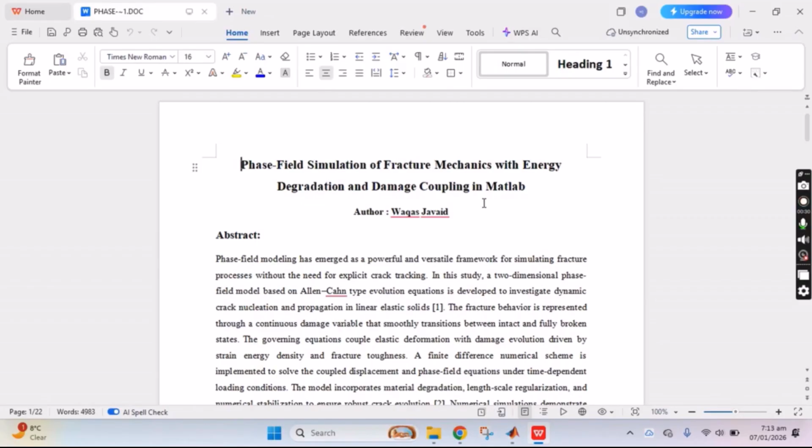So the fracture behavior is represented through a continuous damage variable that smoothly transitions between intact and fully broken states. The governing equations couple elastic deformation with damage evolution driven by the strain energy density and fracture toughness. So the numerical simulation basically demonstrates the initiation, growth, and interaction of cracks from initial flaws.

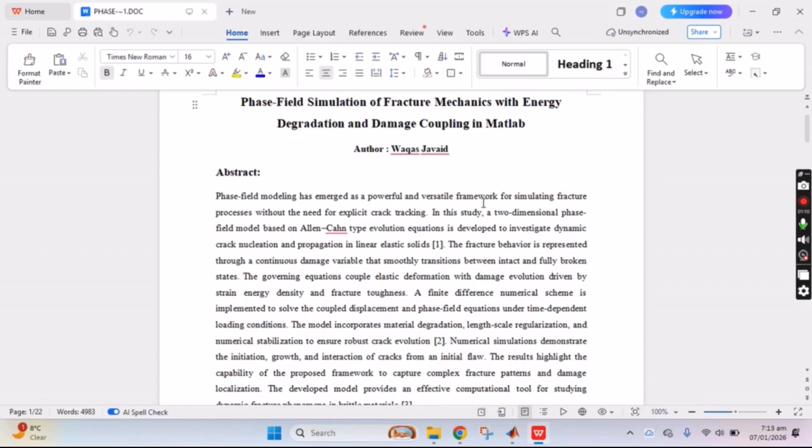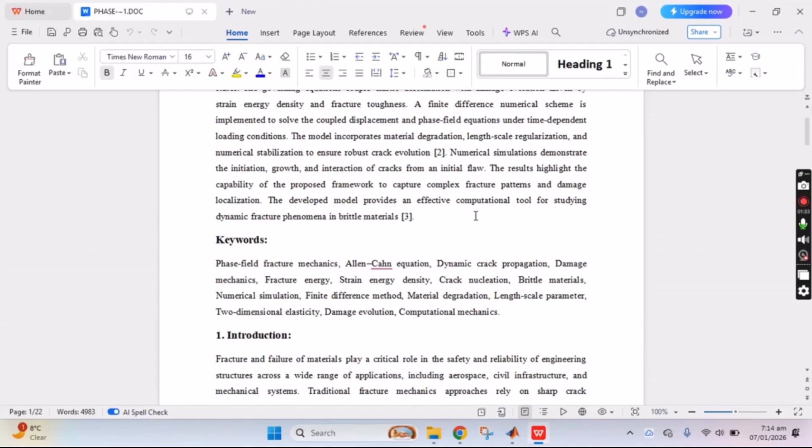In this paper, the results highlight the capability of the proposed framework to capture complex fracture patterns and damage localization. The model is basically an effective computational tool for studying dynamic fracture phenomena in brittle materials. So the abstract with the introduction is written. In the introduction, I have

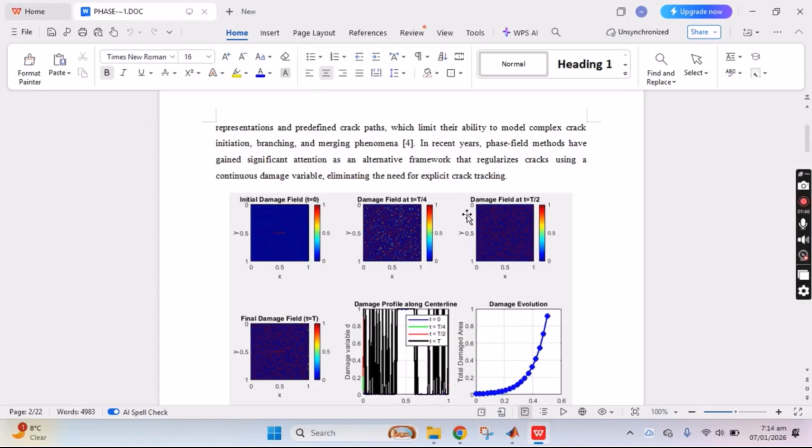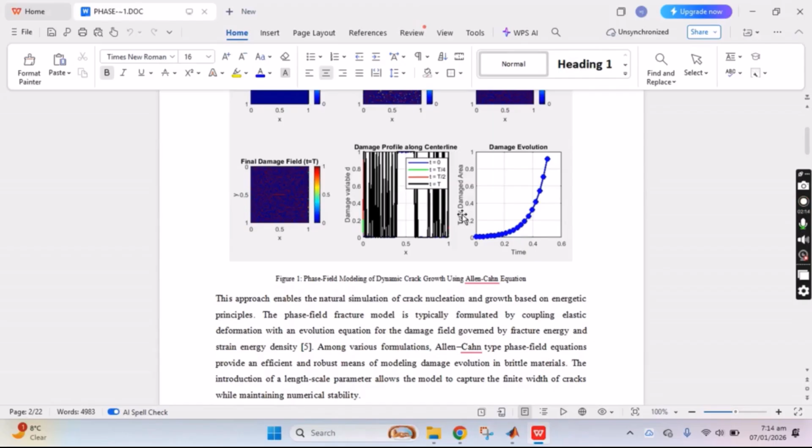explained how the initial damage field with the damage evolution, damage profile according to different phase field modeling of dynamic crack growth using the Allen-Cahn equation. Allen-Cahn was one of the scientists who proposed the type of phase field equations that provide an efficient, robust means of modeling damage evolution in brittle materials as well.

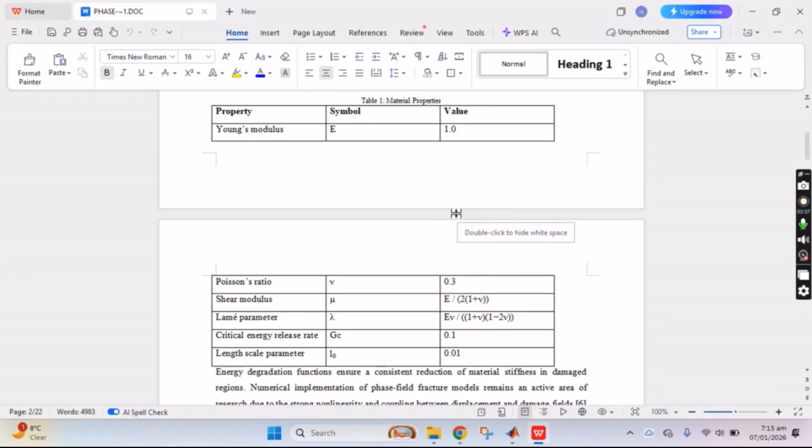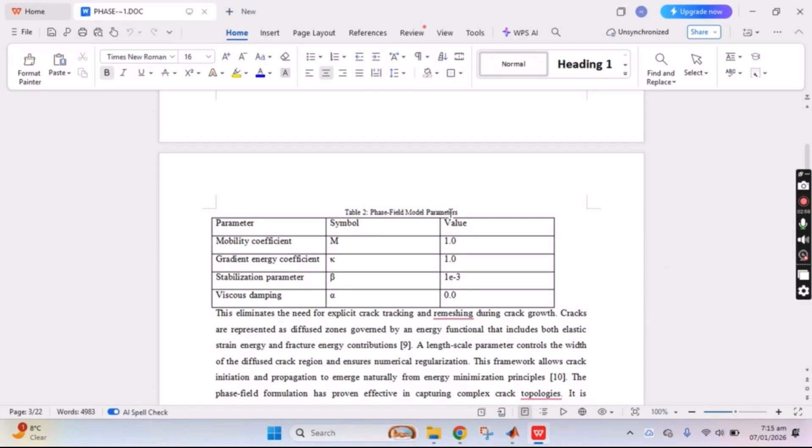Okay, so here are the material properties used in the energy degradation function, in which Young's modulus, Poisson ratio, shear modulus, Lame parameter, critical energy release rate, and the length scale parameter are also used. So this is the background with the phase field approach to fracture mechanics. In the fracture mechanics, I have added the parameters of the phase field model which I have used in the MATLAB code to develop the phase field model.

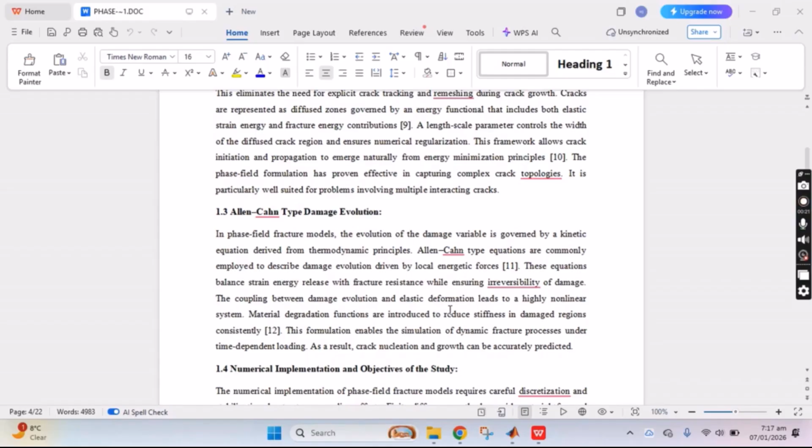Okay. So the Allen-Cahn type damage evolution basically, Allen-Cahn was one of the scientists who developed the equations that describe the damage evolution. So the Allen-Cahn type equations are normally used for damage evolution driven by local energetic forces. So these equations balance the strain energy released with fracture resistance while ensuring the irreversibility of the damage. Okay.

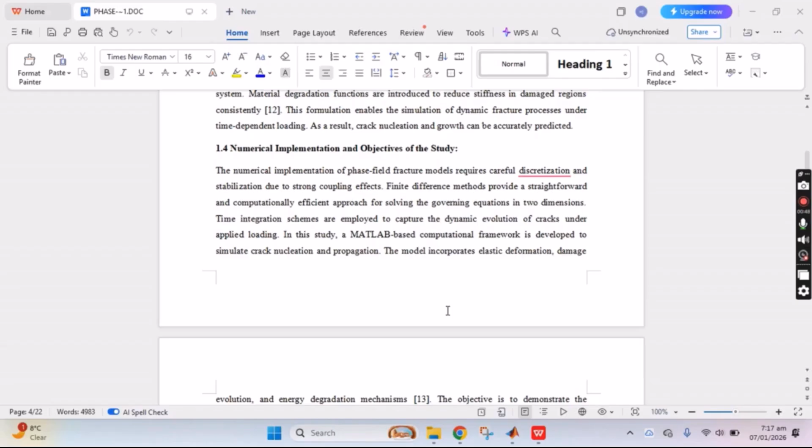So next one is basically the numerical implementation and objective of the study. In the numerical objective, we have added the MATLAB-based computational framework which is developed to simulate crack nucleation and propagation. The model incorporates elastic deformation, damage evolution, and energy degradation as well. So here is the role of energy-based fracture criteria with the dynamic loading and crack evolution and importance of length scale

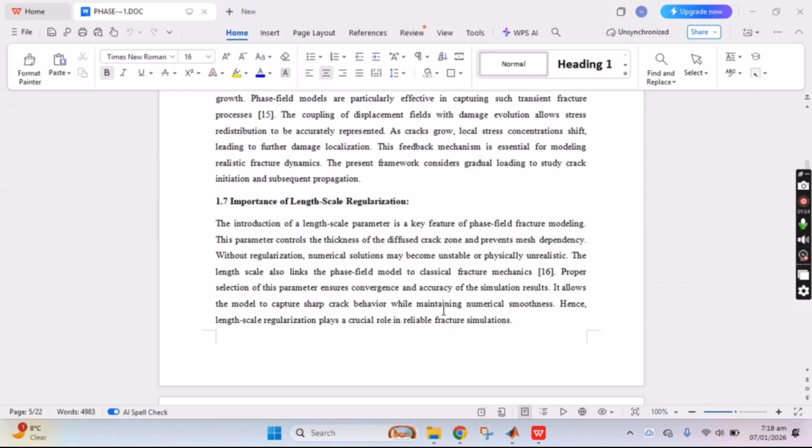regularization. The importance of length is that this parameter controls the thickness of the diffused crack zone and prevents mesh dependency. Without regularization, numerical solutions may become unstable or physically unrealistic. So the visualization and interpretation of damage evolution is basically damage two-dimensional contour plots and three-dimensional surface representations that enhance the physical interpretation. These visualization techniques aid in validating model behavior as well.

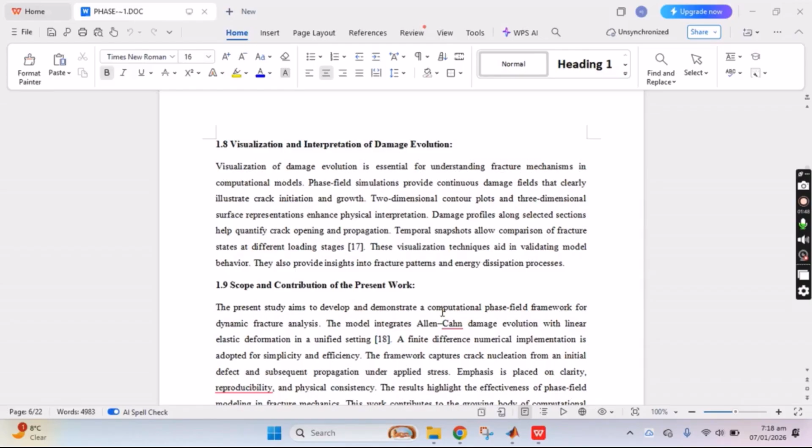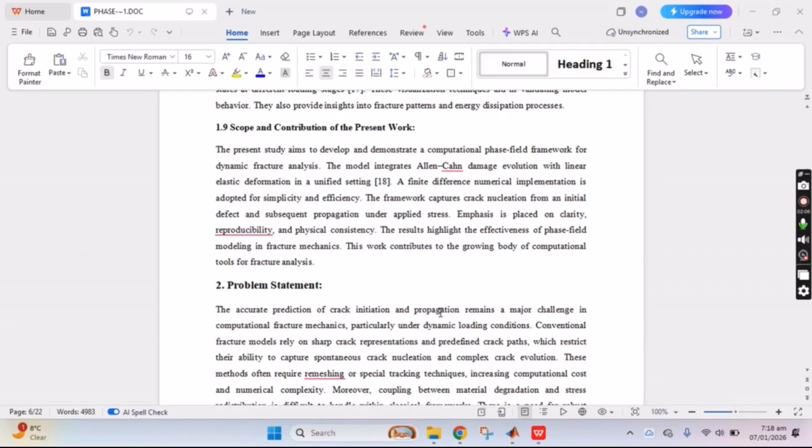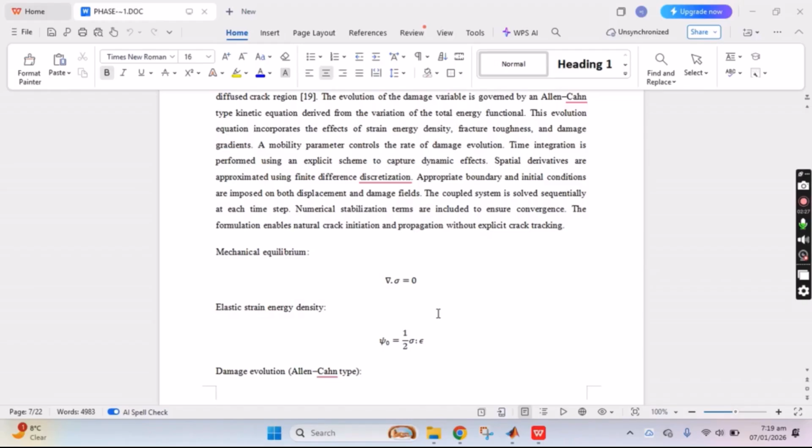Then the scope and contribution of the present work is that the model integrates the Allen-Cahn damage evolution with linear elastic deformation in a unified setting, and a finite difference numerical implementation is adopted for simplicity and efficiency. The problem statement is written, then the mathematical model is explained, and in the mathematical model I have written all the equations used, especially for mechanical equilibrium, elastic strain, energy density, damage evolution, and the Allen-Cahn equation especially.

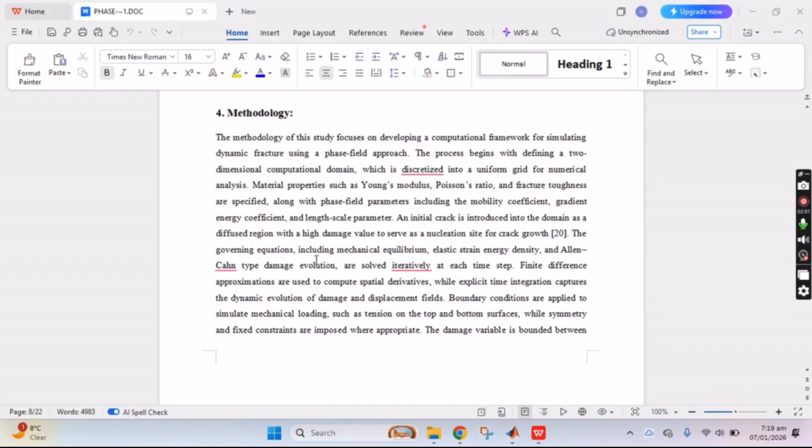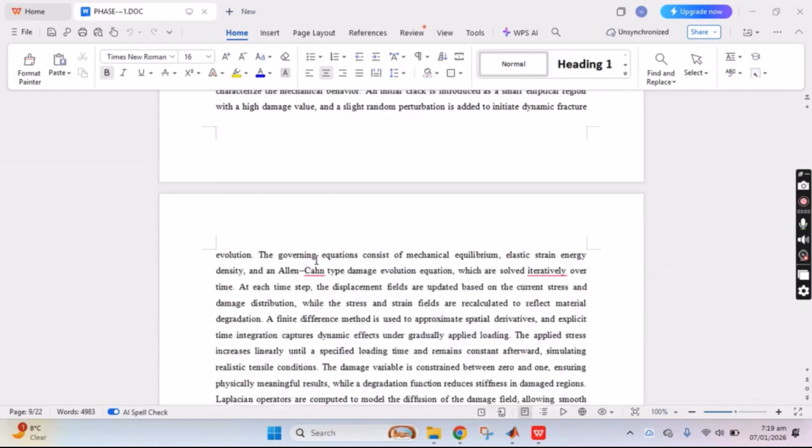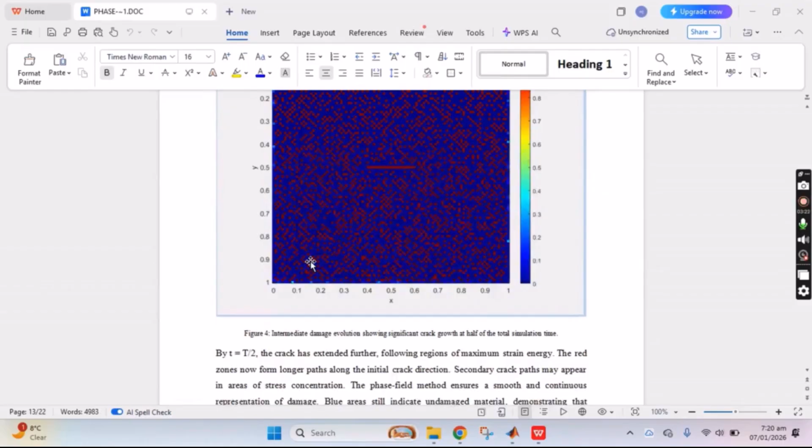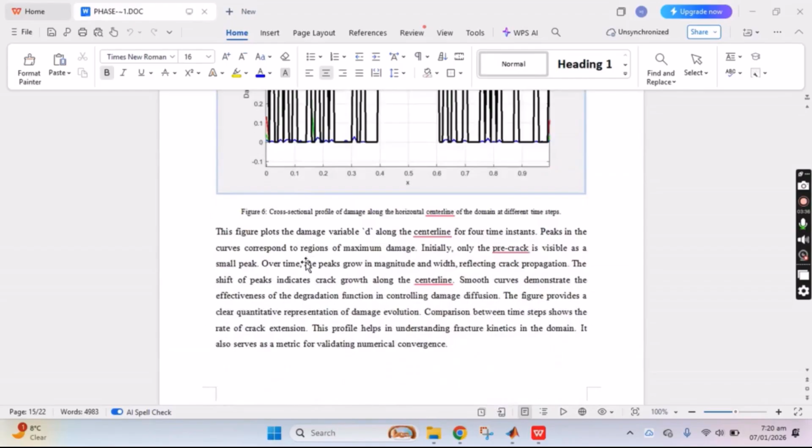Initial damage field at different time scales, like 1/4 of the total simulation time. This is the damage field at half time. Damage field at full time according to the crack propagation. This is the damage profile along the center line. Damage evolution over time. 3D visualization of final damage field. Crack propagation sequence as well, and the results and discussion with the conclusion and references are added.

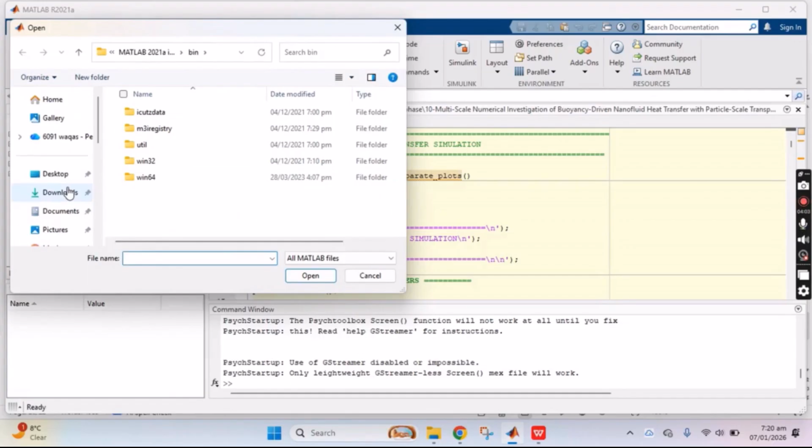Let me just open the MATLAB file for you. The laptop is a little bit slow.

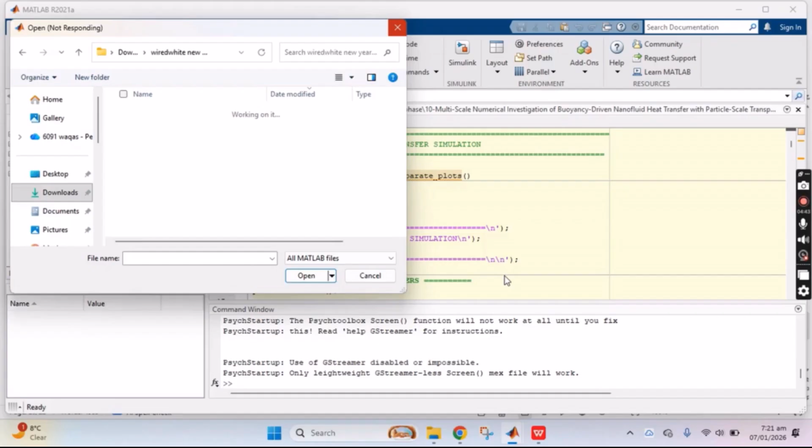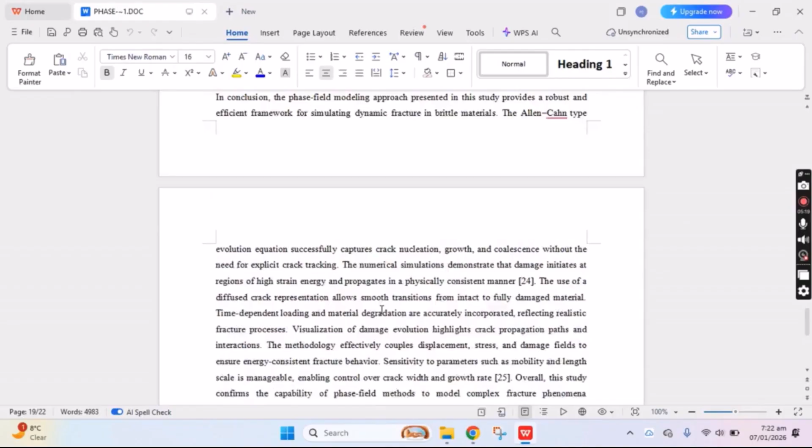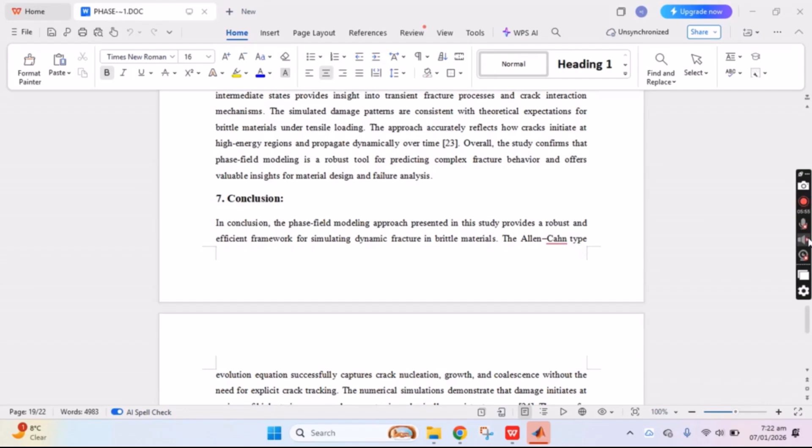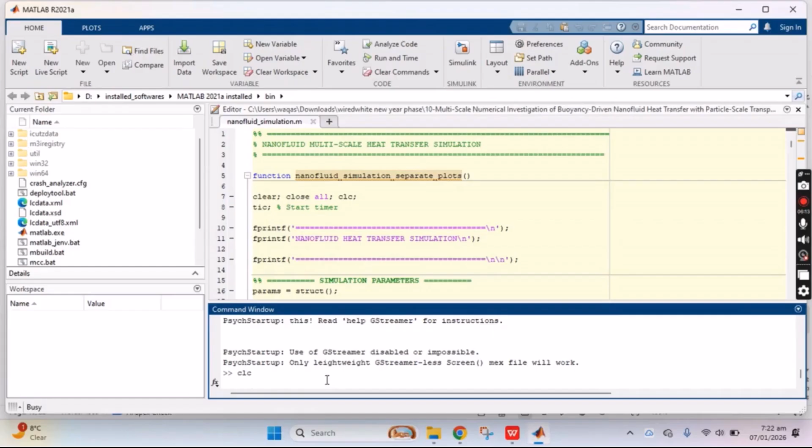Is this the... Okay, just a second, let me open the version. MATLAB demonstration, downloads.

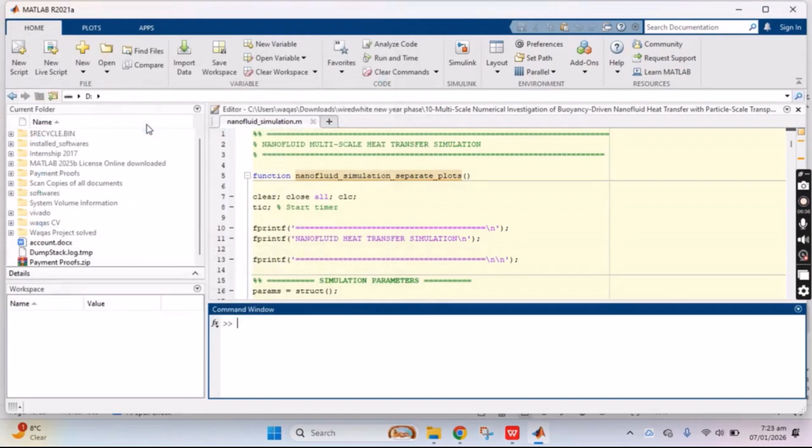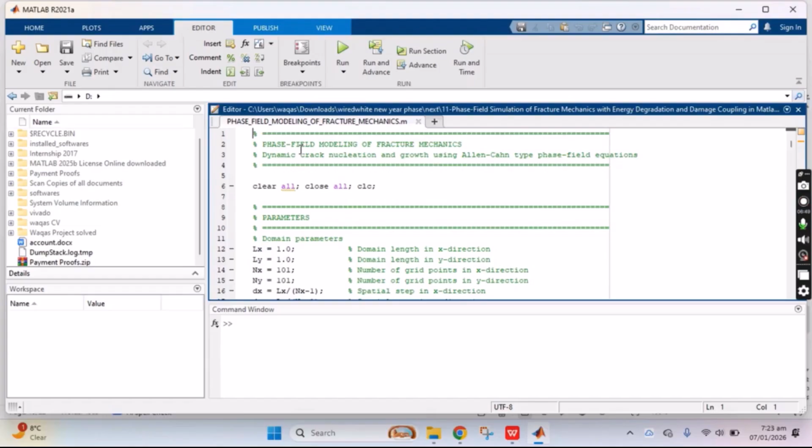So here is the code of this phase field demonstration. You just need to run this section first. See, in the command window you will get the output results accordingly. Progress should be 100%. Simulation completed. Now output results will be displayed.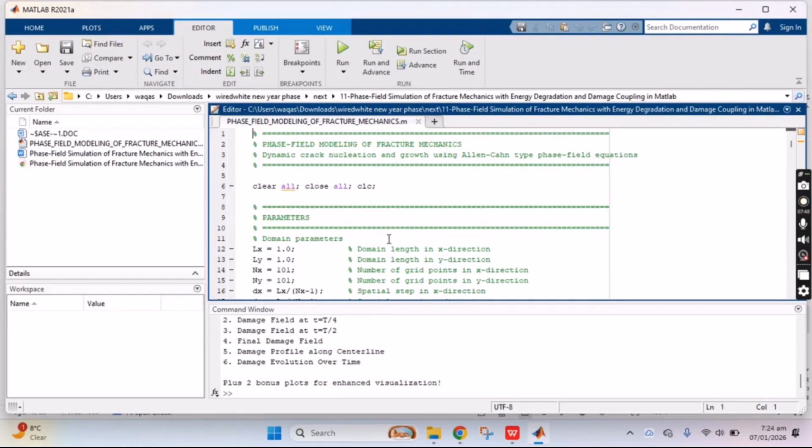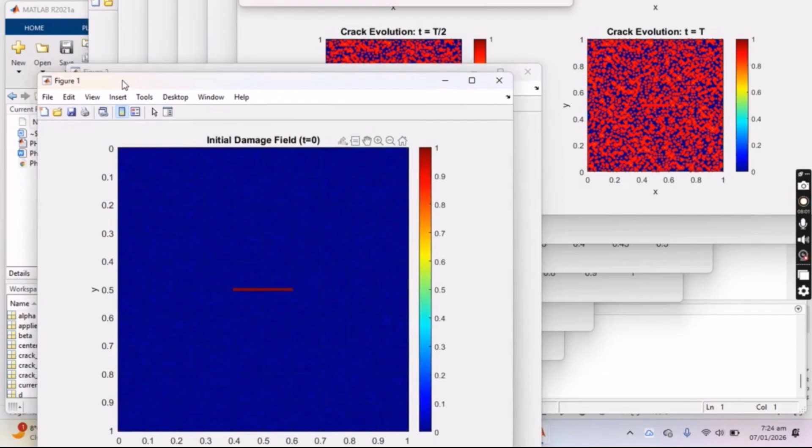See, these are the output results accordingly. Damage field. Then this one, this one, this one, this one. Okay, all the output results are displayed here. Just a second.

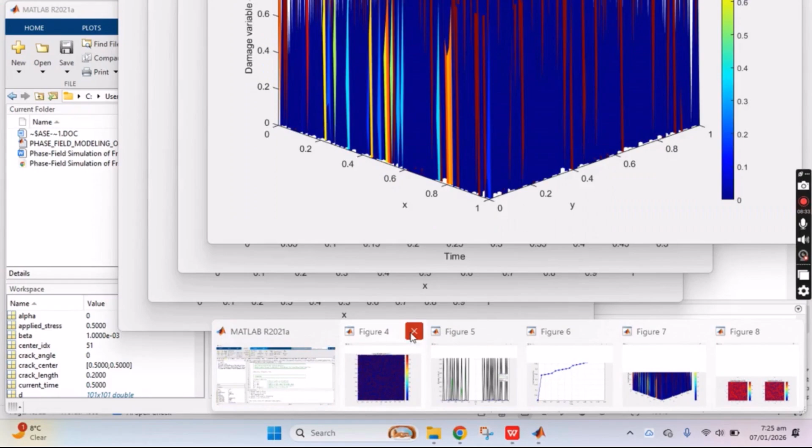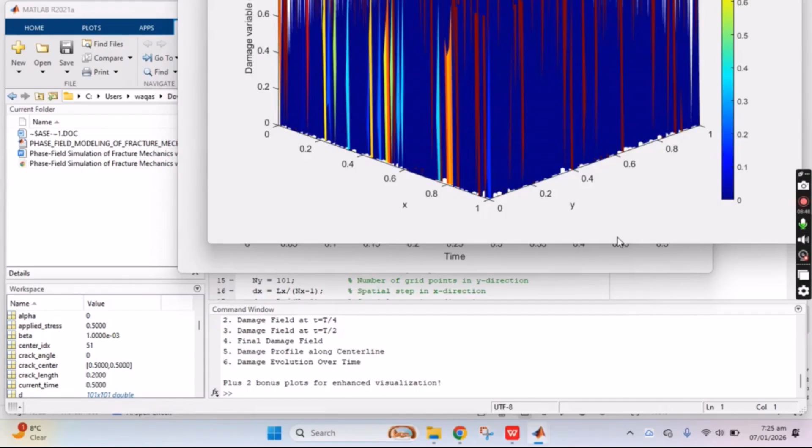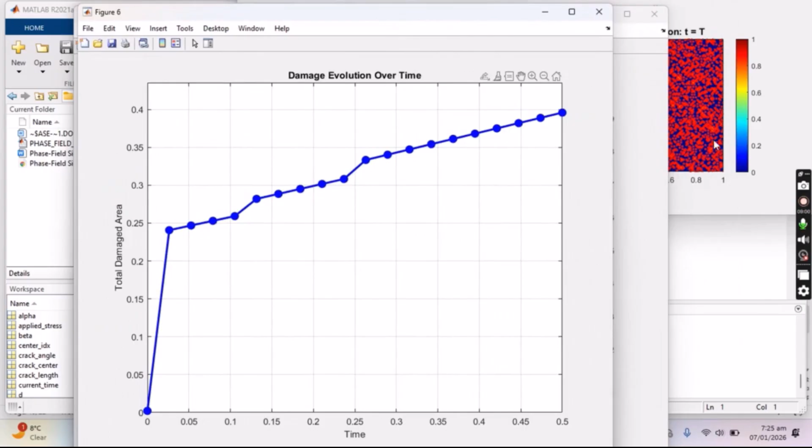See, this is the damage profile along the center line. And let me also show this one. 3D visualization of final damage field. Damage evolution over time. This is the crack propagation sequence as well. Okay.